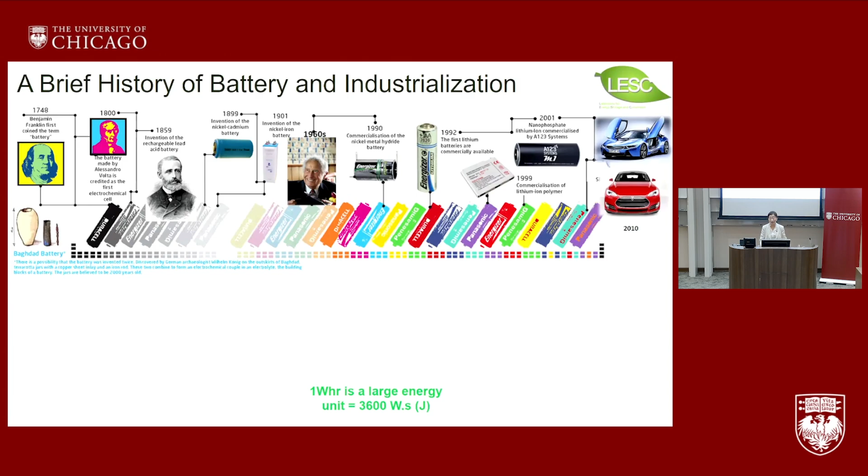Okay, so remember 1960s, American scientist Ovshinsky invented the nickel metal hydride. And these two gentlemen, Professor Goodenough, Professor Whittingham, are the American scientists. Stan is British born, but they're American scientists who invented this called intercalation chemistry, which is the beginning of lithium battery. So the year I was born, Stan actually published the paper, Lithium Batteries, in Science magazine.

And it took another more than 1.5 decades before 1992, Sony. So the third Nobel laureate is Dr. Yoshino Akira, who also contributed to the intercalation chemistry. 1992, lithium ion batteries first invented. So all the people sitting here in the audience realize that lithium ion battery is the youngest among all the battery chemistries.

The important take-home message I would like you to remember is actually whenever scientists invent new battery chemistries, we don't replace the old ones. The older technologies continue to find their niche areas to contribute for mobility, for mobile devices, or for electrification of transportation.

So the lessons for moving forward for the next 100 years of humanity: new batteries like sodium batteries, solid-state batteries will be invented, but they're not invented to replace anything previously invented. They are invented to unlock applications that you previously think are impossible. And hopefully along the way, we are also contributing to decarbonization, and I will explain to you why electrochemical energy is intrinsically a more efficient technology compared to combustion engines based on fossil fuels.

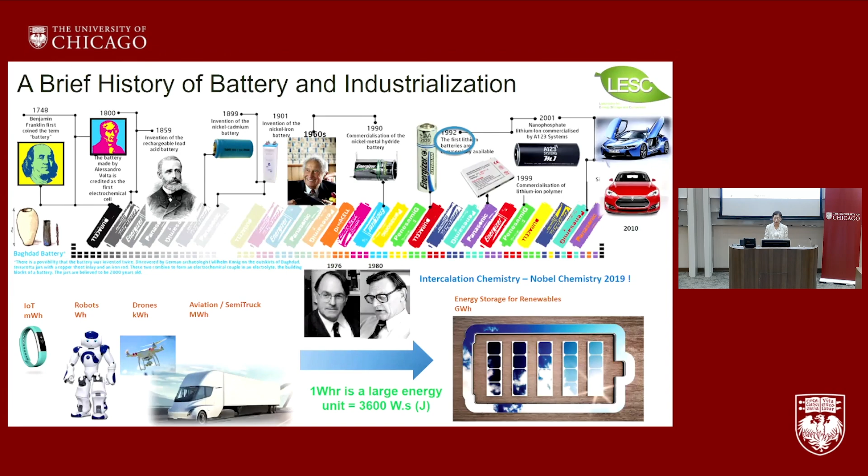Okay, so this overview of the brief history gives you an idea where we are heading, because in the next 100 years, we still have a lot of batteries to be invented, to be made, so that we can electrify everything. And even though people recognize batteries as a commodity, the science, this is the molecular view of batteries. The top box shown on the screen is what intercalation chemistry is about.

So the positive electrode is the layered nickel, manganese, cobalt oxide. The negative on the left-hand side is the graphite. Everybody knows how the graphene layers look. You stack the graphene layers together, it's graphite. And the lithium or sodium ions are just being transported between the two layered materials. So you could think of a bookshelf.

But the difference is that those chemical ions in the bookshelf on the left and the bookshelf on the right have different chemical potential. So you could also think of the hydroelectric dam. When the potential is high or low, water will generate electricity. Same, okay? Battery device, every time you charge your battery, you are making a mini chemical engineering plant because the electricity enables the lithium ions to travel from low chemical potential to high chemical potential, okay?

So when you fully charge your batteries, the two chemicals in your cells are unstable. They are very unstable, but then you immediately use your battery when the screen lights up. So the ions will travel from high chemical potential to low chemical potential, and that's how you get the electrons. And you don't feel any weight change, even though the electrons are being transported, because a battery is what we call a thermodynamically closed system.

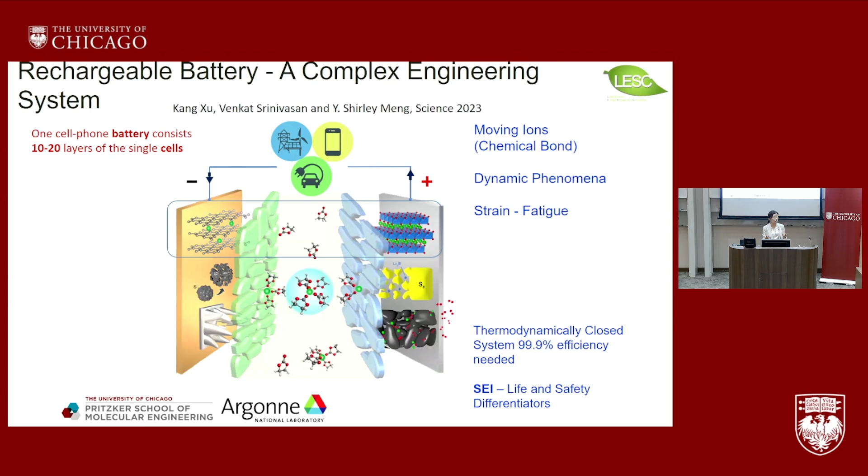So this article we published in Science magazine, for the public to understand the challenges of all new systems, is on the solid electrolyte interface. This brick wall-like item on the left and right-hand side has a very special name called solid electrolyte interface. And this interface, only 10 to 100 nanometers thick, is the determining factor, the differentiator for life and safety of batteries. And most of my career is spent on deciphering what's being generated at those interfaces, because these interfaces are the true differentiator.

Why? On the graphite side, this interface is so stable, right? When you charge your car, imagine you move all the lithium to graphite, a very unstable compound you form. This interface protects these unstable chemicals to stay where they are. So you park your car in the parking structure, you go to Phuket Island, have fun, you come back, the energy is still there.

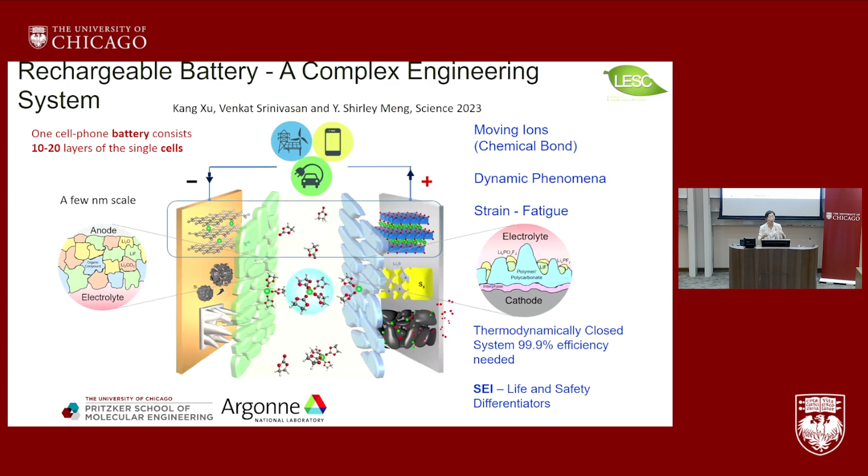Why can't you use nickel metal hydride and lead acid? You don't have that layer. When you come back, 50% of the electricity is gone because the unstable materials just release all the ions, and that's the key to the importance of the solid electrolyte interface. And scientists say interfacial engineering is the secret sauce where we can actually manipulate the lifetime. So your phone is designed to fail in 3 years because we designed this layer so it will deteriorate after 3 to 4 years of use.

And when we talk about batteries, I want to show this slide. This slide was widely used in the United States as a geopolitical issue, but I would like to use it slightly differently to show you the importance of globalization. Okay, so world production of lithium-ion batteries passed the mark of 1 terawatt hour. I told you lead acid took us 150 years to reach 1 terawatt hour capacity. Lithium ion only took 32 years to reach 1 terawatt hour.

So the question we ask ourselves is, for the next battery technology, how many decades do you think we need to reach a terawatt hour? Okay. And the red is the Chinese companies, the yellow is the Japanese, and the blue is Korean. And people use this to scare a lot of the Western countries.

Oh, you know, you only have the 8%, the Europe and the US combined. But let's look at the small timelines I put. These are all my own track record of the historical moments in the battery field. Chinese academician Chen Liquan is the first one who built a production line in China, 1998. Right, the recognition of the importance of the battery industry was way earlier.

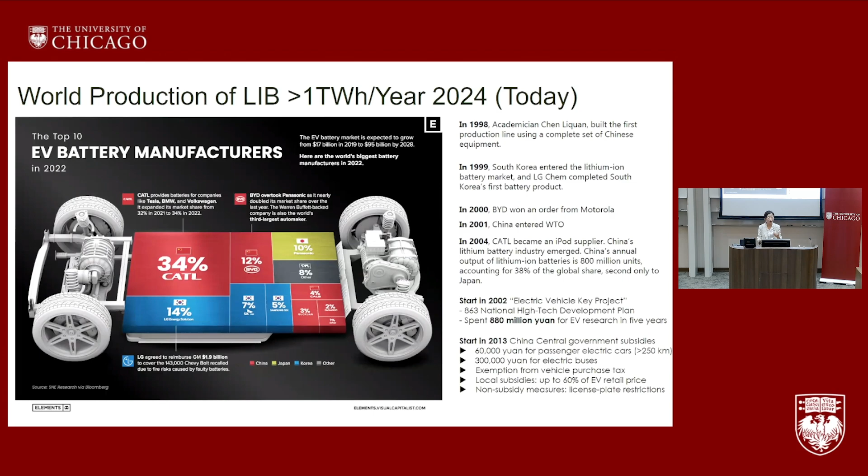So I think it's very important to recognize that China is dominating now, but they got to this position by doing a lot of the right policies, a lot of incentives. Of course, they have protectionism, I will talk about it, but they also had a globalization balance. I would like to give you an example later, particularly about the Tesla story.

This is also a slide I used in 2016 when I participated in the China-US EV battery discussion. I want to show you in 2014, everybody actually started at the same spot. Look at the green bar chart. Okay, the EU is always a little behind, that's a fact. But China, Japan, Korea, and the US, we started 2014 around the same 起跑线, same starting line. And in fact, China had a bigger problem because their EV industry was so behind.

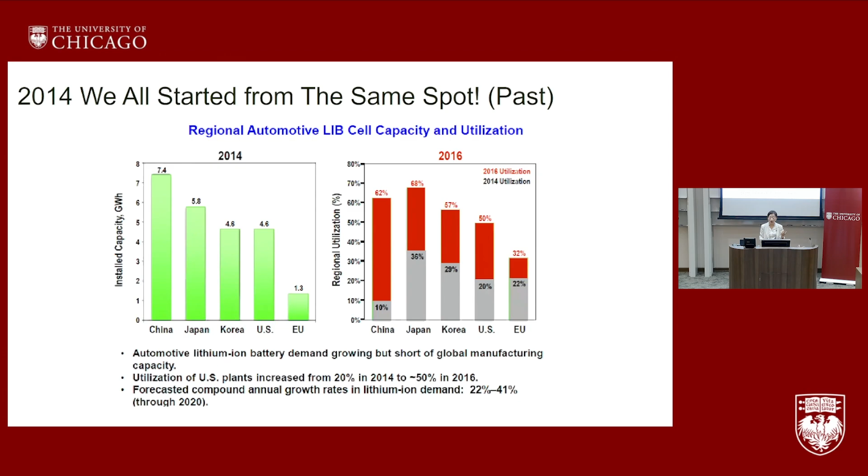So overcapacity, tremendous overcapacity. Over 60% in 2014, the overcapacity was really quite problematic. So I want to say that these are not new data I made. These are from my slides from 2016. So look at how the China government started to implement some of the tariffs; the 25% tariff was important. Let's all remember, right?

And the most aggressive measure China has implemented is really the battery whitelist in 2015. Because in 2011, they invited all foreign companies like Samsung, LG, Panasonic to come for the JDB. However, during the whitelist release, none of the joint venture developments received any government subsidies. So this is China's protectionist policy, but they counterbalanced it with a globalization policy.

Tesla is the only 100% US-owned company that operates in Shanghai. And first of all, I think folks in the US were absolutely shocked by the speed, because from the construction beginning to the lights turning on was 168 days, right? And the most important thing I would really love to emphasize is that when Tesla came to Shanghai, localization of the supply chain was over 95%, right? So we must recognize the contributions of the American companies: they created over 20,000 new jobs, they improved local public transport, they localized the industrial supply chain.

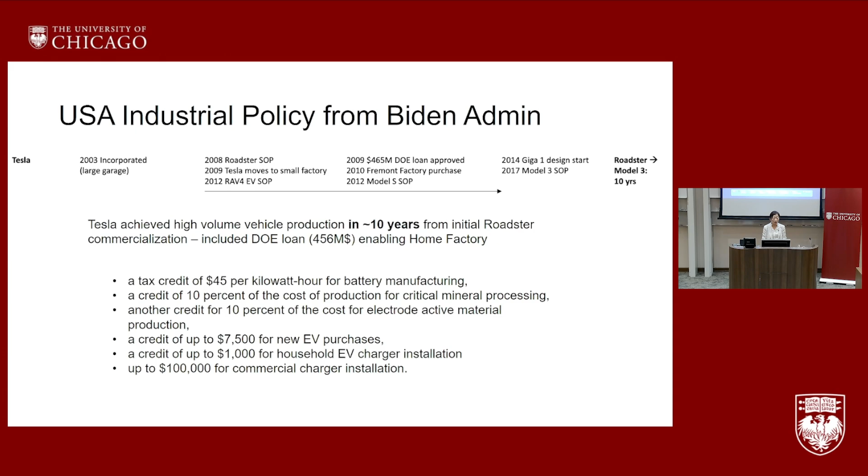And people must remember that the emerging new technologies will benefit from government subsidies or government help, and these are not replaceable by other types of incentives or assistance that we need when we are actually launching this kind of new technology, new initiative. And this is the reason I think the US, at least the last administration, recognized the importance of industrial policies.

Give you an example, this is what the government has released, and you can see it's a very popular policy because the coastal side has almost nothing. Almost all the awards went to the red states. And after this $4 to 5 billion of government incentives, look what happened in the industry, right? This is NAATBatt, a trade association for the US industrial battery industry. Over 100 billion in private funding came in because of the government support.

Okay, actually back then we already knew that we have a problem because the supply chain is not robust. And yes, China controls 78% of the cathode, over 90% of the graphite, and 70% of the global cell production. But we didn't get here suddenly. We got here because of all the history that I have gone through with you.

I think it's very important to recognize that before 2018, the US and China were encouraged to collaborate on battery R&D topics and production. And this is the reason why Tesla's factory in 2019 was built there. And I think this kind of policy, if you want to turn it around, cannot be done within one day, right?

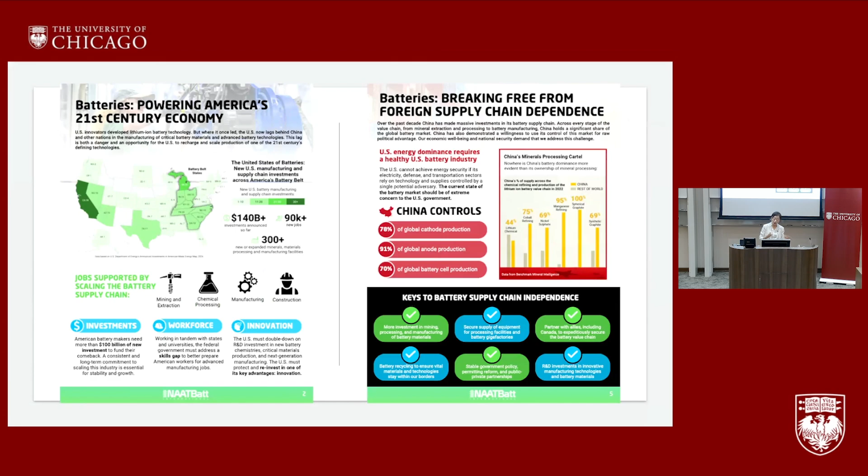So the next step, I think we all should move on to think about the next decade. The next decade for lithium batteries alone is not finished yet, right? The race for better manufacturing in lithium batteries is not finished. So in the US, these four, I think, are extremely exciting areas. The first column is really dry battery electrode processing.

In fact, in 2017, I had the pleasure of serving as the tech advisor for Maxwell Technologies. It's a San Diego local company. 2 years later, they were acquired by Tesla. And this year, even a company like Tesla took more than 5 years to nail the technology for the all dry electrode processed batteries used in their Cybertruck.

I want to emphasize that dry battery electrode processing will revolutionize the way batteries are made. Not only reduce cost and improve performance, but also lower the carbon footprint as much as possible. Okay, the second column is called single crystal nickel-rich cathodes.

LFP, lithium iron phosphate, is being controlled by China because the majority of the production is there. And I also take this opportunity to tell everybody on lithium iron phosphate, China didn't steal anything. There is no such thing as technology stealing because in 1997, when John Goodenough invented the lithium iron phosphate, the patent was not filed in China. So China has the free license to operate. And of course, the acquisition of A123 was very beneficial for China to quickly ramp up their mass production.

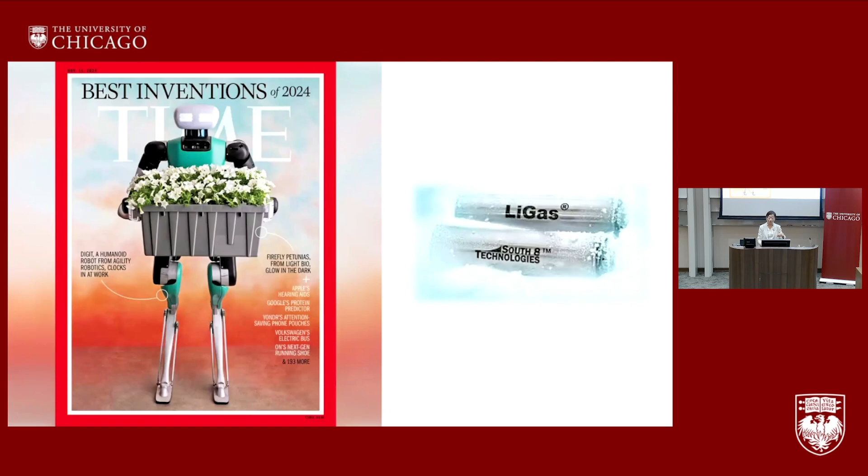So my own group invented a battery electrolyte called the liquefied gas electrolyte. And together, my 2 PhD students started the company called South 8 Technologies. This is also a San Diego-based company. We produce batteries that operate between minus 60 C to 60 C with the existing battery chemistry. Only the electrolyte is new. And last year, my students were very proud to give me a physical copy of Time magazine because we made it to the best inventions list. So this is the area where I think, innovation-wise, North America still has a lot of competitive edges.

The last one is called anode-free batteries. I don't know if you've heard about a company called QuantumScape. It was supported by Breakthrough Energy. Yes, they are commercializing this technology called anode-free. Basically, when you make the battery, there's no anode. You only generate the anode when you are using the battery, and the volumetric density for this type of battery is very superior. And I think the US is still leading quite a bit on the anode-free battery design.

So moving beyond lithium ion, what's going to happen? A rough estimate: I've talked to a lot of mining people, including Emily from Pure Lithium, companies who are trying to extract lithium from unconventional sources. The first 100 terawatt hour, remember, we are only making 1 terawatt hour per year. If we don't ramp up production, maybe we don't have to worry about the source of lithium, but you still have to worry about nickel, cobalt, phosphorus. So if we need 300 terawatt hour and we want the cost for the batteries to be very low, in my group all the students are focusing on this green zone. It's called rock forming elements. Professor Don Sadoway, my former teacher from MIT, always says, if you want to make something dirt cheap, make them from the dirt. So rock forming is this concept of it's everywhere around us.

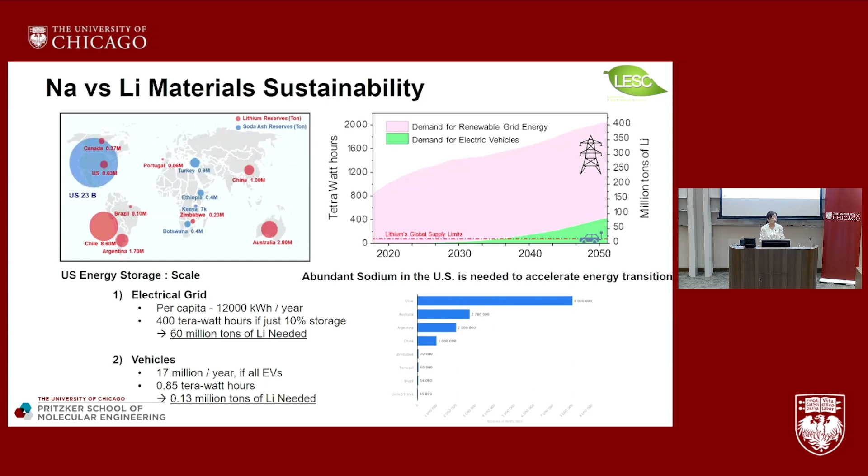And it is really a chicken and egg situation. If you don't have the incentive right, this kind of new emerging technology is very difficult to break the curse, because the initial profit may not be very clear, right? So again, my own startup company, Unigrid. So I want to have the full disclosure. Of course, the lithium-ion battery and the sodium-ion batteries we bought are not the best, okay? It's just to showcase all these kinds of cylindrical batteries.

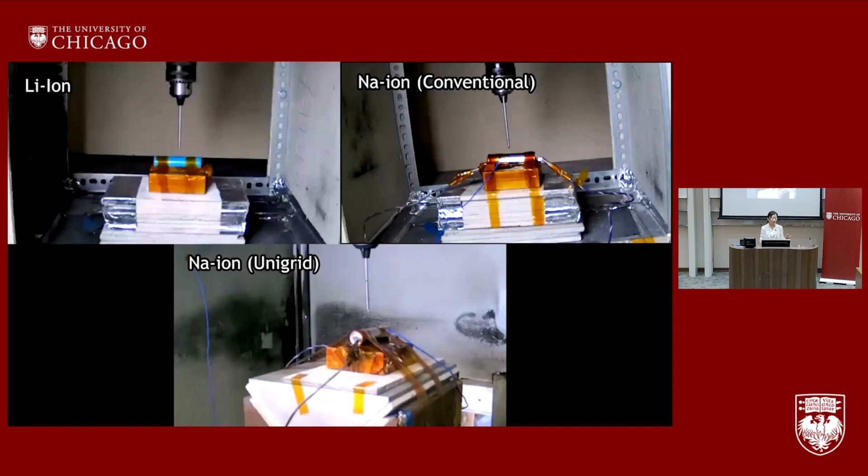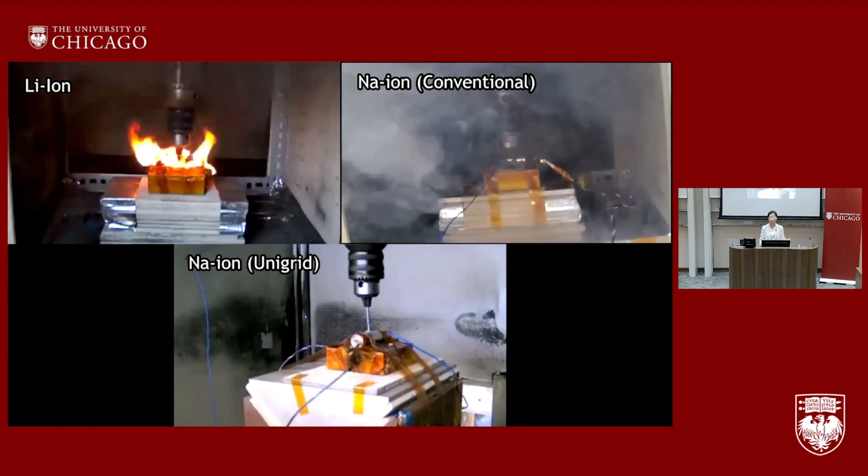They are different in safety. This is a typical nail penetration test. And sodium batteries can be made very safe. And the Unigrid batteries can be made extremely safe if we choose the right electrolyte and the right cathode materials. And of course, we would love to offer the options for people that when you have abused usage of the batteries, they will not catch fire.

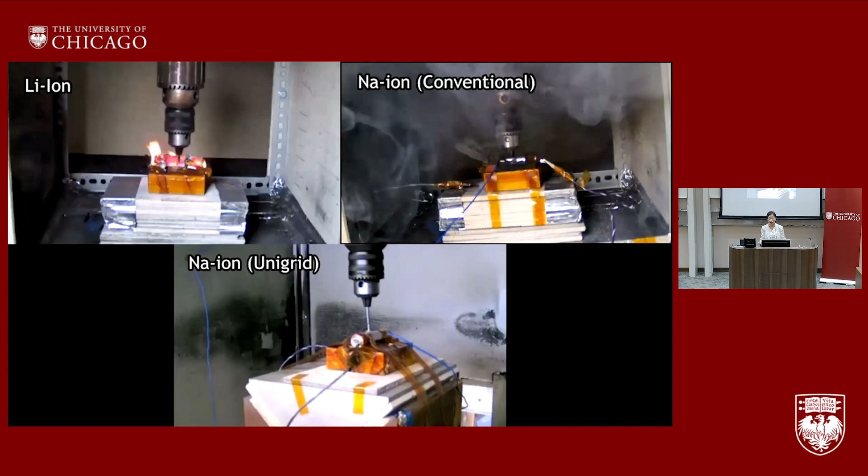You want a refrigerator at home, you must give people this type of product, that if something goes wrong, if the kid does something to the batteries, there will be no major accidents. Otherwise, the refrigerator idea will not work, right? So I hope I showed you some examples because I don't have time to go through all the battery technologies we're working on. But on the big picture, this is again the slide I used when I interviewed for the chief scientist job. The society has always demanded battery scientists for new things. Every time in the last 30 years, we always deliver.

When I was a graduate student in 2000, I was told when the battery price is below $200 per kilowatt hour, everything will be electric. We were there in 2015, and only China actually, now of every 2 cars sold in China, 1 is an electric car, right? The rest of the world did not move that fast, but we made it happen. Right now, the battery cost is below $80 per kilowatt hour. The society asks us, can you make a battery 100% recyclable? The answer is yes. The society demands, it is our job to deliver this type of technology.

And how do we make the recycling process less energy intensive, less carbon intensive is the research focus. And I want to emphasize you absolutely cannot use the same method as for lead acid batteries. Lead acid batteries, the traditional pyrometallurgical method, dissolve everything and leach the metal out. You cannot do it in lithium-based batteries because you lose money. Lithium iron phosphate is a very, very low-cost product, so we have to use a new method.

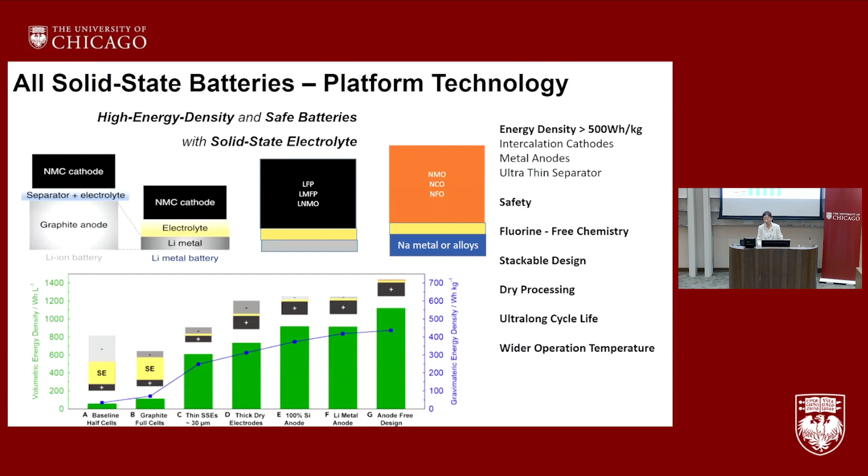So I will spend a few minutes to talk about the solid-state battery. Solid-state battery is a platform technology where we believe energy density above 500 watt-hour per kilogram, which is almost double what is available today, is entirely possible. In the solid-state battery platform, we are also very versatile. You can have lithium, you can have sodium, all possibilities are available.

And of course, this is also linked to batteries that catch fire; we want to enable such abuse-tolerant technology. This is a solid-state battery you can cut, and it's still operating. The light is still on, right? The blue LED, right? It's not magic. This is really happening. Of course, in reality, you want to make a car-sized battery that safe.

That's the challenge. Right now, for global all-solid-state battery development, there's a very big contrast between the West and the East. Every company in the West is a startup. Every company in the East is a tier 1 company. So go figure. I really think it's important for us to recognize the differences, and only through global cooperation can we bring this technology to the world and make those products available.

Of course, it's possible; LG set up plants or Toyota set up plants in the US. It's possible for the startups to come here to translate the technology. But this is a fact, right? I just got a snapshot of all the companies currently doing solid state. And I think there are zero solid-state batteries for sodium right now. So one is waiting to be born. So just some personal views.

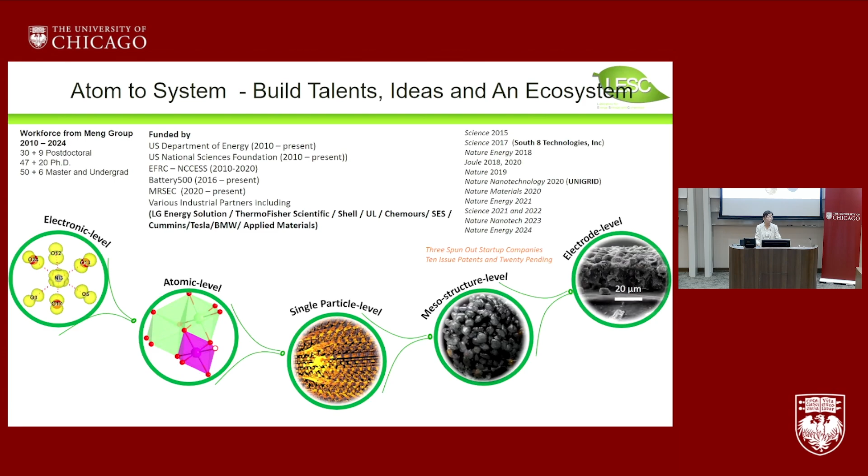And I have already had a very rewarding academic career, really thanks to the US federal government, the Department of Energy, the National Science Foundation. I just hope all our academic institutions can go through the current storm together, collectively, and I think staying together and fighting this battle is very important. At the same time, my industrial partners are all stepping up to help the current situation in North America. More than half of our students are supported by companies like Tesla, BMW, Shell, UL, etc.

So I'm almost at the end of my talk. I just want to take this opportunity to say I'm incredibly lucky at the University of Chicago. Last October, we launched the Institute for Climate and Sustainable Growth. I'm in charge of energy technologies. Professor Michael Greenstone is on policy and markets, and Professor David Keith is on climate system engineering.

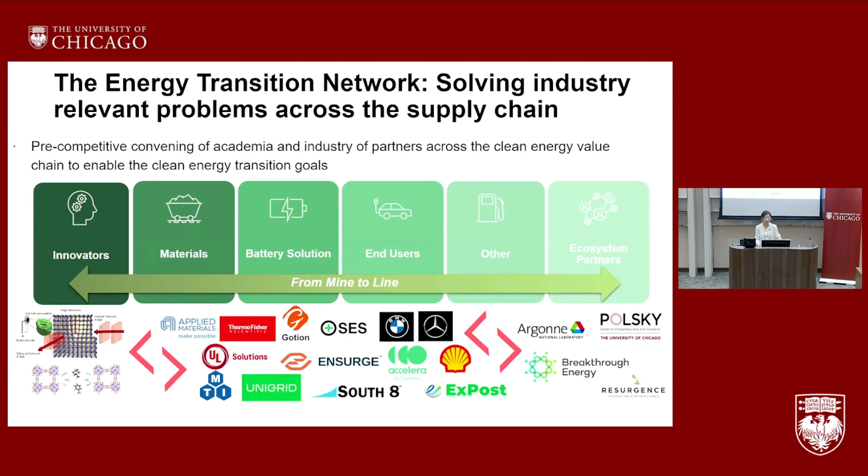And after the Climate Institute launched, the Energy Transition Network is official now, and all the companies have signed up. I'm very lucky to have Argonne National Lab support and Breakthrough Energy support. I hope that in North America, with the mindset from mine to line, we will be able to connect the innovators all the way to the ecosystem. And I think this model only works if industry, academia, and the national labs work together.

So let me finish by saying that we hope the Energy Storage Research Alliance, funded by the U.S. Department of Energy, really is... if you look at our core team, I feel like my job is really to bring together the best early career, mid-career, senior folks in the United States and really think about how we create this battery ecosystem where creative ideas can really translate to impact in society.